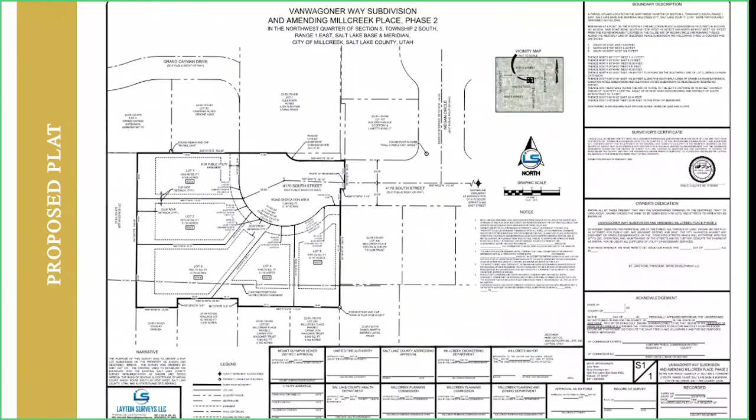The newly created access is an extension to 4170 South, and has been designed to eventually connect to Grand Cayman Drive once the property at 838 East, 4125 South starts developing. This is not something we know will be developed, but if development comes to this property, there may be a possibility to connect Grand Cayman to 4170 South.

Additionally, there was no development agreement recommended through the rezoning application, so basically we just have to rely on our underlying ordinances, such as the subdivision and zoning ordinances.

To conclude, the subdivision of property will effectively create 5 individual lots for ownership. The major subdivision will not create any remnants or other unusable lots or parcels. Again, the newly created lots from this subdivision will not limit the city's ability to effectively provide services or facilities in this neighborhood.

A communication overhead line will need to be relocated prior to plat approval. Apart from that, the proposal does meet the city and state requirements pertaining to subdivisions. The project will still be subject to further review and final approval, which is what we call technical review.

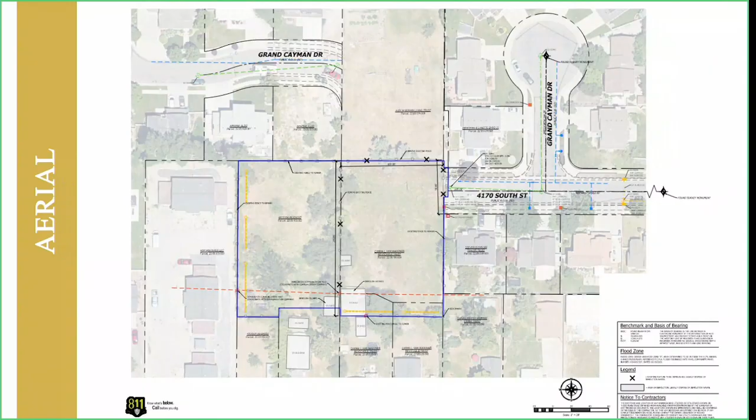I actually had one question now that I'm looking at it. The slide that has the roadway showing, I'm just wondering what's happening in that other space on the north east. So nothing is currently happening in that part. It's just a mock-up drawing probably of what is envisioned for that road once that is developed. But the only development we're concerned with is what's shown on that blue square, that is what's being proposed.

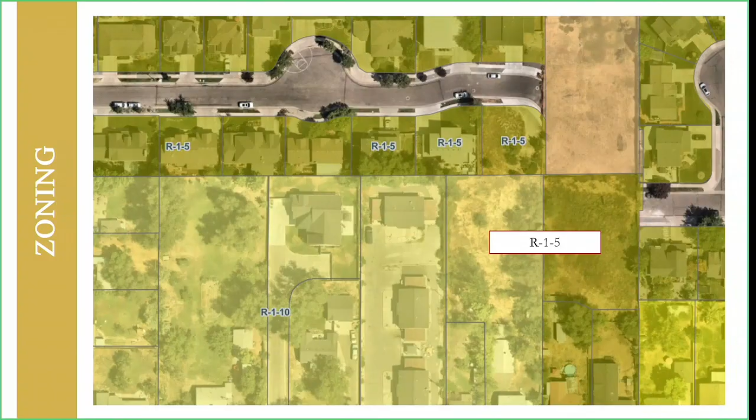The other lot, as you can see, the lot on the north right now, it's just pretty much empty. And it does hold different ownership.

So is there any way of making that a pocket park or something? It's outside of the subdivision, so probably not. We don't have a way to require that as dedication because we don't have a plan for a park in this particular area. It would entirely be up to the owner for this lot to be developed.

Yeah, I'm talking about that other space. Yeah, that's within the... isn't it? I mean, the road curves, isn't it within the subdivision? Are you talking about the small shoulder there? Maybe, I don't, yeah, just, right, like there, all that area. I mean, because it seems like there's some space there. Yeah, there's going to be about 5 feet, looks like, behind the sidewalk line. Oh, what's this?

So this is the road? No, the sidewalk here. Oh, that's the sidewalk. Darn, right, okay.

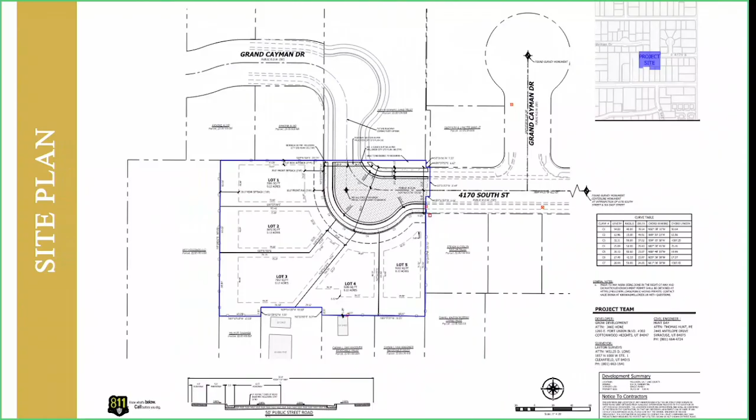Thank you. Carlos, just confirmation that UFA, Unified Fire Authority, probably reviews the plans to make sure the access for their vehicles works with the proposed road. Right, they have been reviewing that, and I have not received anything different. It's something we will continue working on during technical review.

Okay, thank you. I'll close the public hearing and then bring this back to the Planning Commission for discussion and a motion. Jacob, since you're streaming, I'll let you offer any thoughts on this if you'd like.

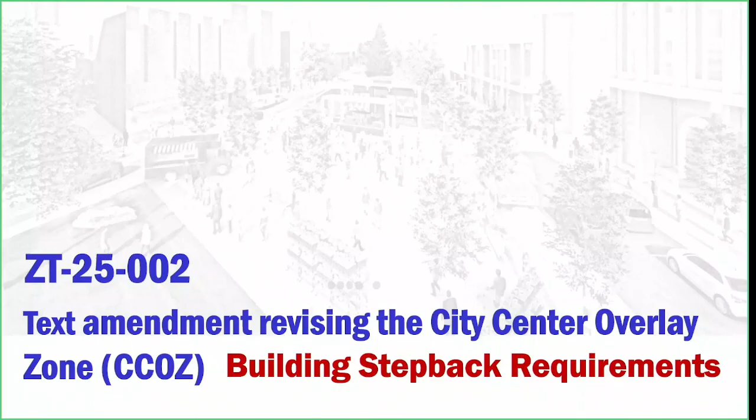Oh, there we go. Let me back up. For the record, ZT 25002, text amendment revising the city center overlay zone building step back requirements. So this is basically giving you an outline of what was requested, the staff petitioning city council to amend the city center's building step back requirements.

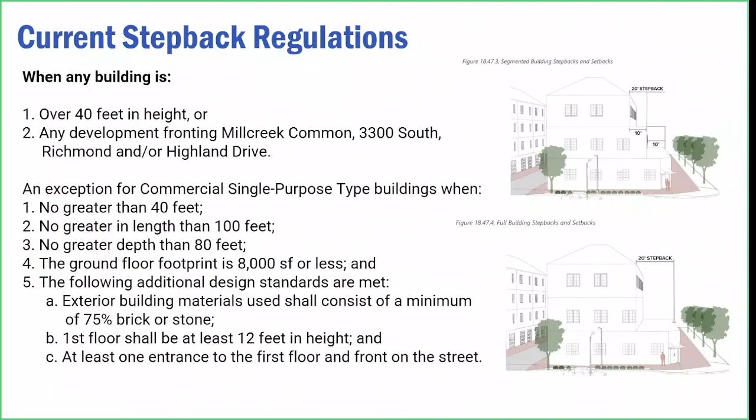In the staff report, I detailed what the current limitations are and the development challenges. I'm not going to read through this, but the images showcase what the current step backs are, which is, as you can see, generally a 20-foot step back after the second floor, but they also have the option to do two 10-foot step backs. And this would apply to any building over 40 feet in height and/or any development fronting Millcreek Common, 33rd, Richmond, and Highland Drive.

So this is kind of where it starts to get confusing, and when we're finished with the presentation, I'll gladly walk through it and answer any questions. But due to those challenges I talked about in the staff report, we wanted to take a step back. The city center overlay zone is probably 5, 6, 7 years old now, and we need to take a fresh look at this and provide some alternatives, some ideas, instead of having this 20-foot building step back as our only mitigation tool for mitigating mass and bulk.

So our idea was, let's come up with some options. I spoke to probably a handful of architects and debated back and forth what was the best tactic to move forward with this, and came up with some options based off of these themes: aesthetic, compatibility, and public benefit. As you can see, the aesthetic option is just, let's attack it through design enhancements, 8 of them. I included the design enhancements in the staff report, but also included them as a supporting document. Hopefully that helped you guys in the end, with some images and examples of what that is. So the first one is just, hey, we're going to do 8 of them.

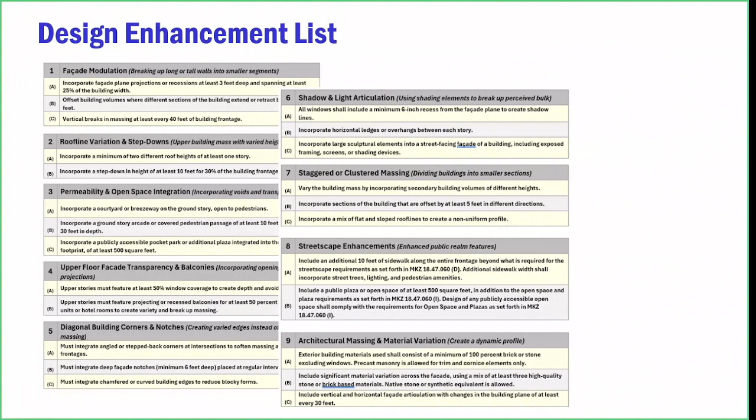So that's it - like I said, I slimmed it down so we could have more conversation time, and I put in some model motions that we can dissect later, or you guys can use. But yeah, let's have a discussion about it.

Okay, well thanks Rob, good stuff there. I know it was a lot of time pulling all that stuff together. I do have a high-level question.

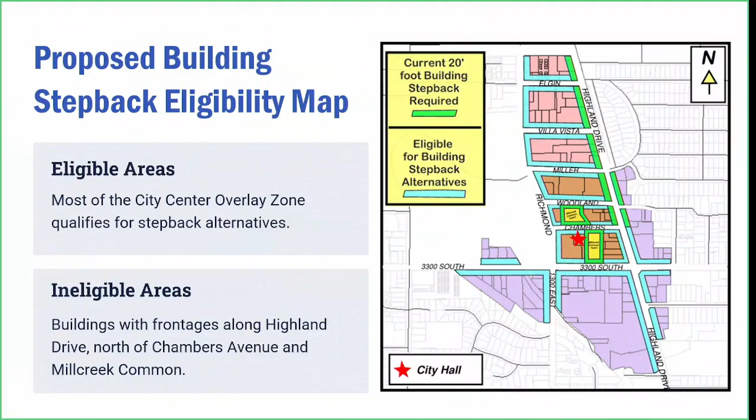So then I wanted you to explain the parking option, because I can't see a bunch of surface parking. So it would be underground parking in their buildings, or structured parking like we're doing here, wrapped by buildings, right? So it would be parking used by residents as well as the public, or publicly available?

It would have to be publicly available to people visiting here, doing commerce here, eating at restaurants, visiting City Hall, coming to planning commission meetings.

Well, we know that I always have these issues about safety in parking lots and parking structures, so they need to have, in my mind... well, I'll talk about that later.

And then I had a question about option number 8: does extra 10 feet of sidewalk mean an extra 10 feet of setback, or just 10 feet more of concrete? It would be 10 feet more setback. Setback, okay, good, and that was a big one.

Open space, plaza space - after going to the community councils, next to the public benefit of having that parking, because everybody's addressed parking, I think plaza space and open space matter more - not just more concrete, but more landscaping, more little grassy knolls to hang out on, right?

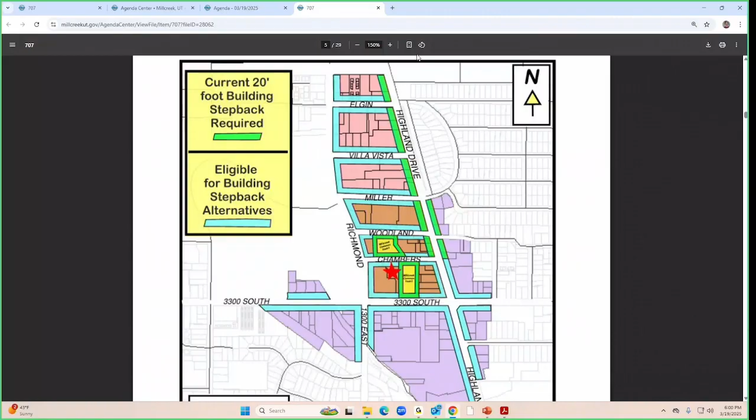One of the challenges that we have with Millcreek Common is that we've taken the hearts of 2 blocks and turned them into public spaces, and that's pushing everything out toward the side, right? And in some cases, our step back requirements are pushing up against these developable sites on both sides, and there's a definite trade-off there.

But I note that Millcreek Common in both phase 1 and phase 2 is significantly bigger and significantly wider than what even the city center master plan envisioned. And that is squeezing the balloon on either side here, because we're greedy, I guess, and we wanted all this great space in the middle of the block.

Go ahead, Nils. I don't mean to complicate it by throwing out another idea, but - No, do. We got like the idea of having options and having flexibility, and I think these are good ideas. I like the idea of maybe even approving, particularly I like option 2 and option 3. You could do either or. If you meet the requirements of one, that's great.

If you meet the requirements of the other, that's great, because it seems like a win either way. So if it's an option, maybe not even limiting it to one, but maybe doing more than one, because if we like them, and if they work and they're a benefit for the city, then approve them both. Just an idea. Thank you.

So would you think about, let's say we use all 3 options. Do we think about saying you can only have a percentage of each one of them? So that there would have to be choices of the 3 options and not end up with all option 3 or all option 1?

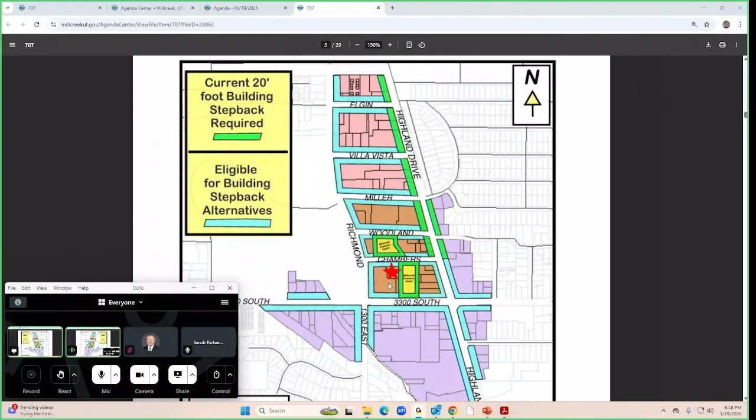If I can get down to brass tacks, the city wants to build a parking structure on the east side of this property, and we don't want to own the whole thing forever because we want to offload it. Developers are telling us that we can't build on this thing if you want your parking structure and if you're insisting on the setback between Chambers and 33rd South. It's just a flat no for them. And we're not doing this for affordable housing, we're not doing this even for multifamily, we're trying to actually attract commercial development here. So this is where it gets kind of really difficult.

Because we're up against kind of competing values, right? One of which is activating the space, providing a retail opportunity on the east side of Millcreek Common, which we say we want. But also there is this element of creating a really wonderful streetscape, which we want. And for what it's worth, as staff, the reason why I kind of hit on this public benefit option is because we think that best encapsulates a reasonable trade-off, because there is a real trade-off.

For a building that might not have a setback south of Chambers Avenue here on the south side, but in exchange, we get a parking structure, we get activated retail space on Millcreek Common, we get enhanced design standards, and we can still maintain that minimum sidewalk that we insist on as part of the city center overlay zone. We might even get some extra open space. That's one example, not the only example we're dealing with. We're dealing with a number of properties where there are real constraints that the setback requirements impose upon us. But it really comes down to what do we want as a city and what are we willing to trade off to get it, because we probably can't have everything.

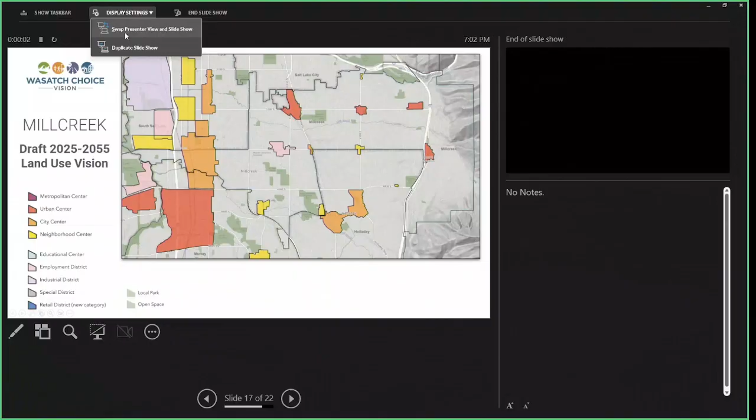So it's interesting to see a great variety and distribution throughout the community. I'll mention that the interrelationship between centers is something we'd like to provide another perspective of. We had the opportunity to receive some state funding to provide illustrations of different center types. In the next few months, we'll be creating graphics that show how centers can relate to each other. When you have a string of centers, we start to see possibilities for different levels of transit service or beehive bikeways between these centers, which may warrant more investment for increased ridership demand. Again, these are transportation choices that are made possible.

And I've learned a lot more about that interesting shaped Millcreek City Center based on your work tonight, and hearing how you're adapting to changing market conditions as you understand them. So I'm just curious initially if you have any questions of what I've presented, or if you see anything that stands out to you on this updated 2025 land use vision.

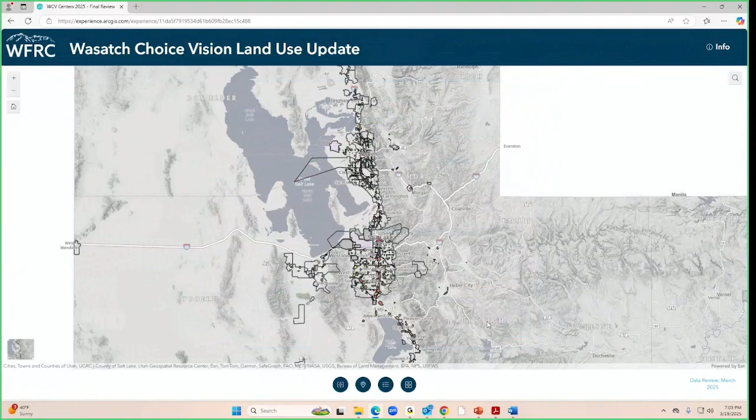I did earlier in the slides. There was a little animation showing a map, and you could click on the circles and it would give you information. Is that available? I just went to the website, and there's a lot of tabs and different places to look. Is it on the website?

Okay, so did you go to the Wasatch Front Regional Council TLC, or Transportation Land Use Connection? Yeah, I just went to the main page. And we could even look at it after.

Okay, but there was, several slides back, maybe a dozen slides towards the beginning of the presentation, a little animation that had little circles, and you could click on them, and it showed how it would then display information. I'd be happy to guide your staff to get back to that website.

That was basically just to see which projects have been funded in the past or present through our Transportation Land Use Connection program, and give you a sense of where you might need some additional support in the future. Commissioners, other questions?

I have a question about the top of this map where you had Wasatch Boulevard—can you shrink that down? So the city center there at Mount Olympus, you have that listed as red on the graph, which is a city center, right? Urban, an urban center. So what's the difference between an urban center and a neighborhood center? Because we think of it as a neighborhood center.

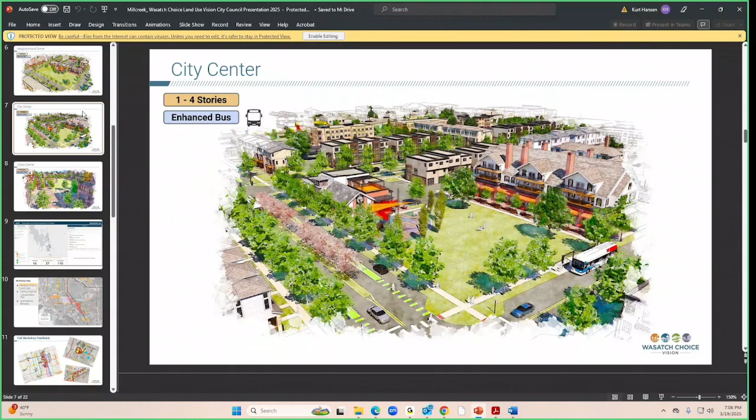Maybe we could also look at your workshop map on slide 10 or 12. Well, that might be—right, so it's possible that we put red and should have put orange for the city center. I think just looking at these pictures, it's more either a neighborhood center or a city center. It's probably a neighborhood center, right? Because our code has a hard limit of 3 stories on some of that stuff, and it's mostly going to be built out now. So those could go back to neighborhood center.

It's a quick little action by some of our staff—if you and I don't anticipate any 4-story, it could remain or go from red to orange rather than red. Good catch. And I'm not sure, I think these might be these two here—this is the 23rd and 33rd, this is Canyon Rim. Those might be more orange and less red. I'm just thinking about what our own general plan says about it.

So the one furthest east along the boulevard would be yellow neighborhood center, and the other two orange city center, potentially? That's my suggestion. Okay, great feedback—that's exactly what we need, to get this right and reflect your community's vision.

I'm curious, Francis, what's that little square in the southeast corner, the little yellow one? Where Facile Taco... is Facile Taco gone? Yeah, that is Holladay. Is Facile Taco gone? They made really good tacos. No, it's like a small strip mall with a gas station or something. Oh yeah, okay, just don't tell me they're gone—they're really good. Yeah, that's just what that little yellow thing is, and the gas station, whatever it is.

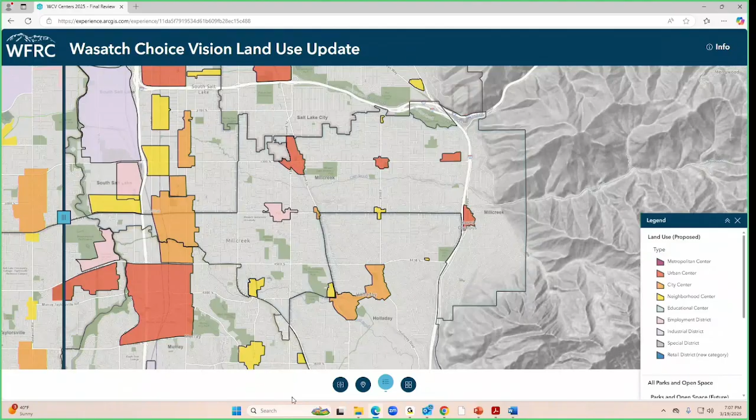Francis, would you mind going to the previous slide that showed the TLC, Transportation Land Use Connection, that you brought up? There we go. That would be earlier—I lied, it'd be later. There it is, slide 16. No, I think it's—keep going up. There it is, slide 9.

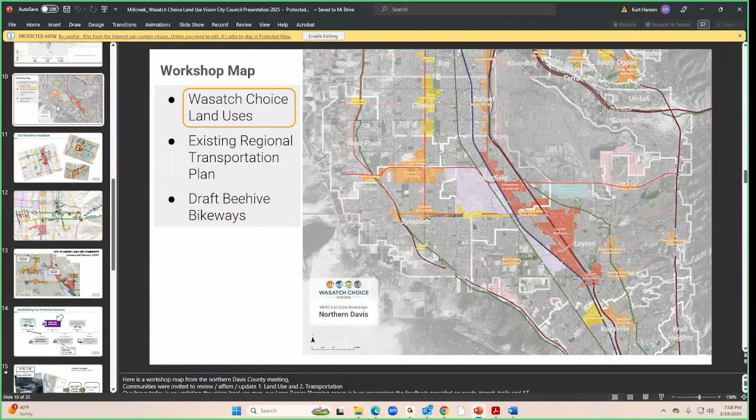And then we have yet to list the 2025 awards, which I understand there's an active one—the ADA update. It's a small award, but meaningful for retrofitting and improving pedestrian access to your buildings and so forth. So we appreciate that application and all the good work you're doing in the community.

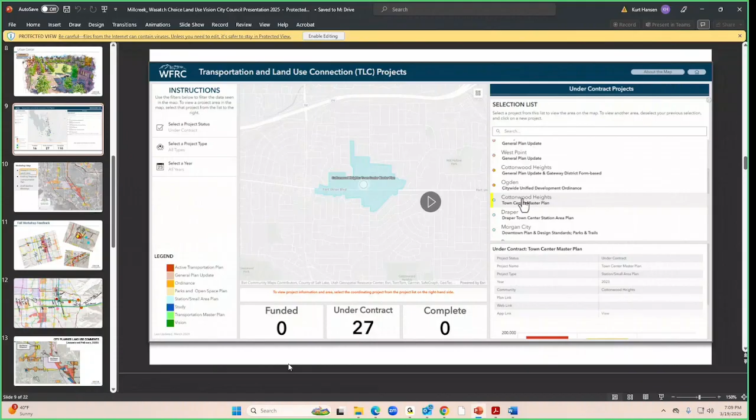Thank you, appreciate you all. Thank you for the update and for hanging out with us for almost 2 hours before we got to you. It was enlightening, and I really appreciate it. Okay, thanks, we'll see you Monday.